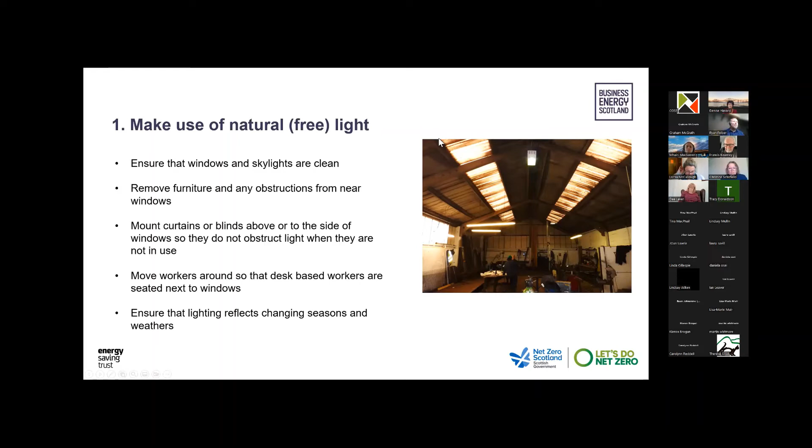Second one is thinking all about heating the buildings. One of the really important things, and again most of you will probably have started putting the heating systems on, is just thinking, how have you done that? Have you programmed the heating systems, or are they just on and off? When do those systems come on?

I'll give you an example. Yesterday afternoon, I'm based in Inverness, it was really sunny. So actually, had I programmed my heating to come back on in the evening, it wasn't really needed. I didn't put my heating on last night. So we've got to really adapt, particularly this time of year where it's not automatically cold.

When do you need the heating? Where are the controls for that? Is it central controls? Have you got individual controls for different areas? And then, obviously very importantly, do all those areas need to be heated? You might be a community group with an event going on that evening, but nothing for the next day. So again, you want to program the heating to be on just for that.

Have a think about when the heating comes on and how good your property or building is at retaining heat. By that I mean, if you're starting at 9 and finishing at 5, for example, you'd ideally want the heating to come on a little bit beforehand, so when you arrive at 9 o'clock the space is warm. But does that need to be on for an hour? Two hours? Can it be on for just half an hour? If it's only half an hour in the morning, that's great.

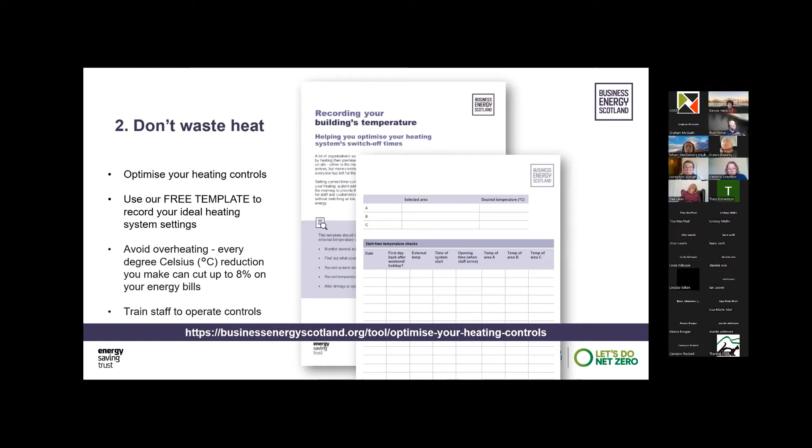We do have a really cool spreadsheet where you can start thinking about that. Use this template to record heat in different areas.

The other one is really thinking about hot water usage, with the idea of making sure there are no leaks and that the taps are running as they should be. A great example is thinking about toilets - most of you will have them. Some of you may have push taps. They're fantastic, they can be great because they turn off the water naturally, but it's really good to think about if they are working correctly.

To give you an example, an ideal push tap should only last around 10 seconds. If it's lasting much longer than that, it's wasting water - you're better off having somebody push it a second time rather than running for too long. It should take about 12 seconds to fill about 1 liter of water. If it's filling much quicker than that, the flow rate is too high, and all this hot water you're paying to heat is literally going down the sink. They're minor tweaks, but do have a look at that.

Obviously the bigger cost is around the hot tap rather than the cold tap, but you are also paying for cold water in most cases.

Do have a think about where the hot water is coming from. We've come across many businesses where they've got electric immersion tanks, and they could be filling up really large tanks for maybe only a few taps. So do these tanks need to be left on all the time? If you're not there over the weekend, or a couple of Mondays and Tuesdays you don't use the premises, then you're probably better off turning that off and reheating it, putting it back on the day you're back in. Ideally a little bit beforehand, because it'll take time to heat the water up, but that will be a lot cheaper than having that hot water constantly there for the two days.

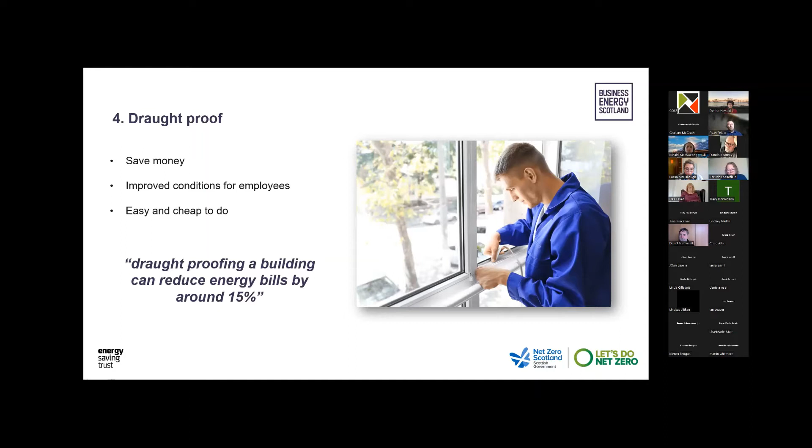This one's about hot desking, probably more initially relevant to businesses that have got desk spaces, maybe different office spaces on different floors. Just have a think that there are a lot of people working from home at the moment, so office spaces aren't being used the same way. If there are opportunities to do hot desking - allowing people to work wherever they want in the building or in the same areas...

This way you may only need to heat one office, one space. There's only 3 people coming in, there's 3 desks in there. So again, just think about the logistics - do all the spaces that are there need to be used?

If you're more of a community group, and you've got your hall, and maybe some groups have got multiple halls, have a think - if you rented one of the halls in the morning, it makes a lot more sense to use that same hall in the afternoon if you can, even if it's slightly bigger or smaller, as long as it meets the requirements of whoever's coming. That space has already been heated, already has some heat in there, so rather than letting that cool down and heating a different hall or space, if you can manage that with the logistics, that's a really good way to save energy.

I've kind of focused on heating, but it's going to be the same with lighting. If there are spaces that are not being used and you can combine those spaces, then obviously the lights and things like that can be off in those areas.

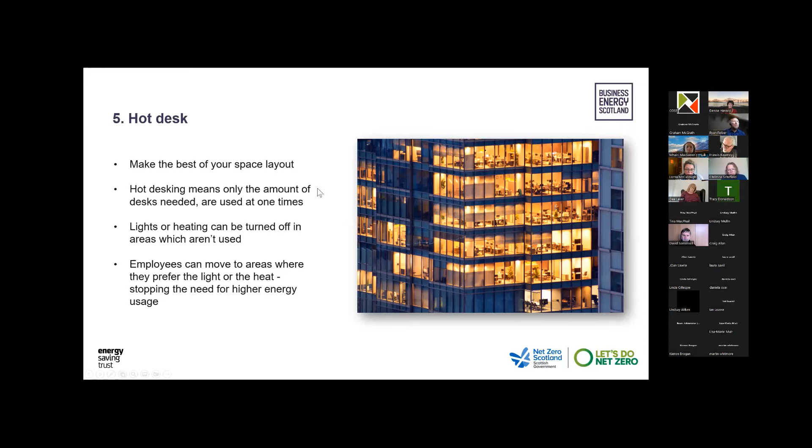This one is about staff awareness. We've talked about lighting, heating and heating controls - it's really making sure individuals coming into those buildings, whether staff or visitors, understand how these things work. We've found so many cases where only one person knows how to do the controls or change the heating, so if they're on holiday or away, things don't happen straight away. Share the knowledge of how things work, what can be turned off, how to program heating for different rooms - the more people know, the better it can be managed and controlled.

If you're slightly larger, we've got a really good resource where you can tailor things to your organization. There's a little quiz you can do, there's even a certificate, raising awareness about what you're doing. And if you're implementing changes, like only putting lights on in one area at a certain point, communicate that so people understand.

We've been to several businesses where it's automatic - whoever comes in first in the morning puts on all the lights, in the kitchen, the bathroom, all the offices. If they start at 8 and everybody else comes at 9, that's a lot of energy for just one individual.

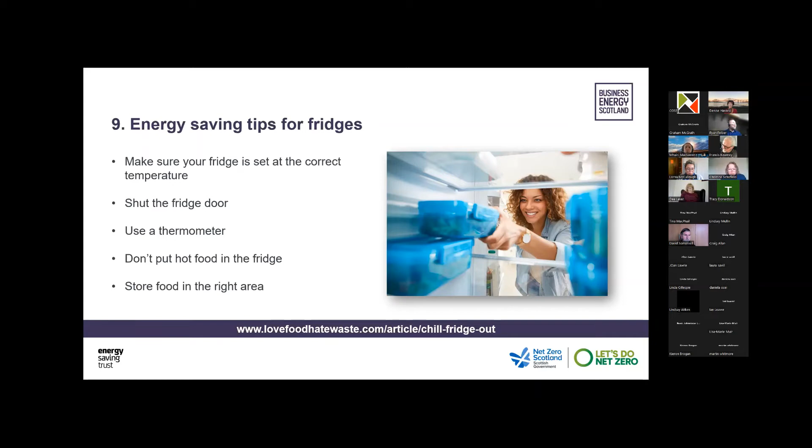And obviously the salad drawers for salads and things like that. One of the little tips, and I think Denise won't mind me saying it hit home yesterday with her: it's easy to open the fridge, grab the milk, pour in your cup of tea, and leave the fridge door open just to put the milk back in. That's at least a good 30 seconds if it's just one cup of tea, and if it's several, it's a little bit longer. So do get in the habit - those few seconds of leaving the fridge door open lets all the cool out, and once you shut it, it's going to work a lot harder, using a lot more energy purely to cool things back down to that temperature. So grab the milk, close the fridge door, pop your milk in your cup of tea, then reopen it and pop it back in.

What that can do is help you understand your usage, and understand if there's very high usage at certain periods. That could be overnight, where you'd normally, if the offices and things are shut, expect a drop in consumption. So if it's the same levels as during the day, then there's something going on. You need to start thinking about what equipment's being left on - is there something running that shouldn't be? You can obviously identify patterns of wasteful behavior, so if all of a sudden there's a spike or change, what's caused that? It could be that something's been left on, even if you thought you'd programmed it - whatever happened there. So really good tools on there.

We also have our profit monsters, and they actually focus on different areas. We've mainly focused on energy, but obviously water and waste are also areas of cost where there are opportunities for savings. So if you want a little more, please feel free to have a look at that.

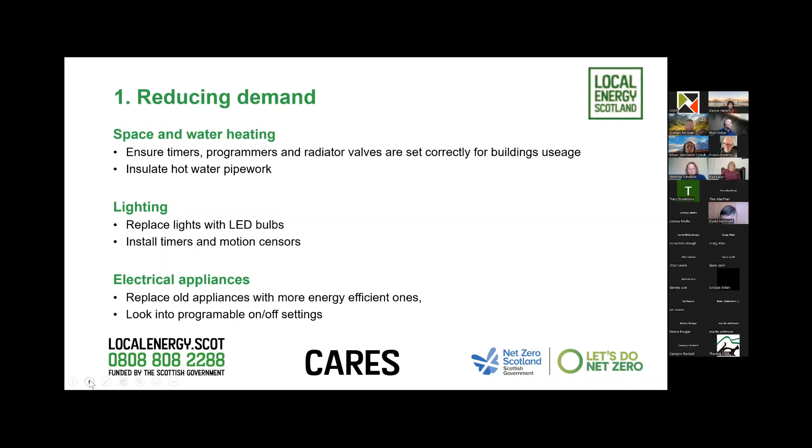The next step in the hierarchy is about reducing losses. When we're thinking about where heat specifically is lost from, I've taken this data from a typical domestic property - a typical gas heated detached two-story building - but it's a good approximation. The majority of heat loss, 35%, is coming from the walls, and a further 25% from the roof. Those are the two big areas of heat loss. You also have 18% loss from the windows, and then 8% lower loss from the floors. The roof and walls are where you're going to have the biggest impact in terms of reducing energy loss, needing less energy to heat the building, and therefore reducing your carbon footprint and your energy bills.

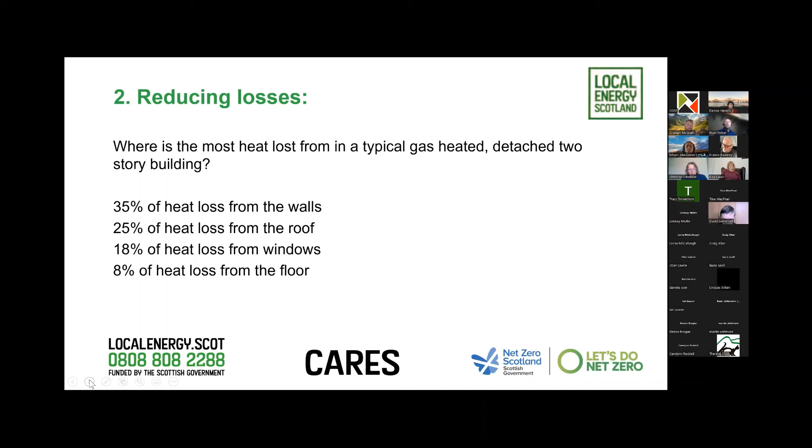Having done that little overview, I'm now going to talk about what different improvements you could potentially look at making to your building as part of any retrofit works. Starting at the top of the list, that's the lowest cost, easiest things you can do. Moving down the list, they get more expensive to install, and generally tend to be more disruptive to the building and the ability to use it.

Draught proofing, something Ryan covered, is that you can go out and do yourself very easily. You could also think about secondary glazing, which can range from a very basic piece of cling film that you put over your window pane to cut down on drafts coming in, to more temporary or permanent perspex glazing that sits behind your existing window, which would maybe be more of a job for a professional to install.

Moving on from that, loft insulation is also very straightforward in a lot of properties, not all. If you're in a church, it might be quite a difficult proposition, but for more modern buildings it can be very easy to just roll some insulation into the loft. If there's any issues around damp or ventilation that you're concerned about, it might be something you want to get professional advice on, or have installed by a professional.

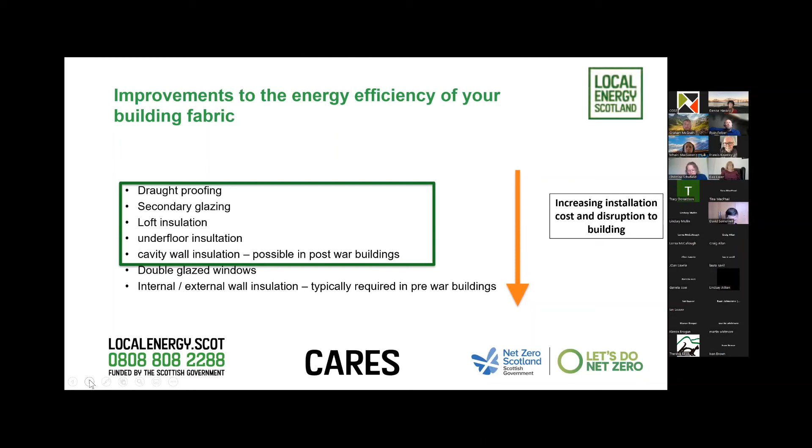You'll notice I'm not discussing absolute numbers here in terms of costs, partly because it's going to be very different depending on what sort of building you're in. Some buildings are a lot cheaper to retrofit than others. Also, with the inflationary pressure at the moment, we're finding that each time we have a new building come through, the contractor quotes are different and prices are going up constantly. Combined with that, energy bills have risen significantly as well. So although installation costs are going up, the potential savings you can make are also increasing. It's worth bearing that in mind.

Next slide please. So moving on to the final step in the pyramid, which is generating. Once your building has reduced your losses and reduced demand, you might then want to think about ways to generate your own energy. One of the go-to ways to do that on a community building with a suitable roof would be installing solar PV panels. If you've got a south-facing roof, that's perfect, but they also work on east or west-facing roofs, and if you have a suitable roof it can be a very quick installation project.

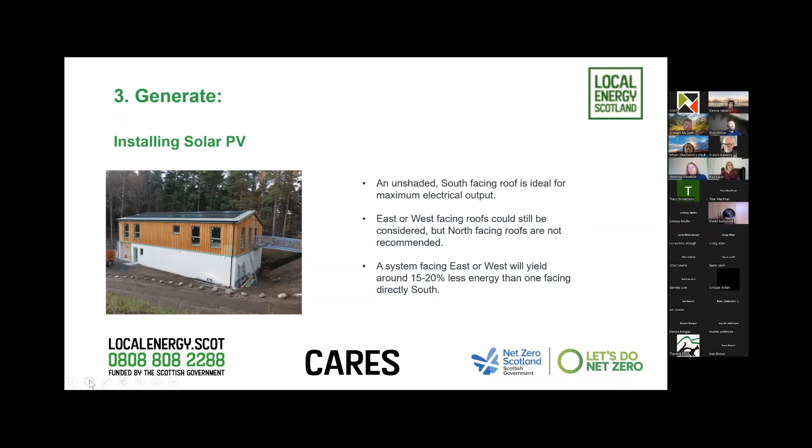Next slide please. Combined with that, technology has really moved on leaps and bounds now, and installing solar PV with a battery now makes a lot of sense. The key use for batteries in community buildings is so that when it's sunny during the day, perhaps you're generating energy in your solar panels, but you might not need the lights on, or if you have an electric-based heating system you might not need the heating on. But in the evening, perhaps there's more usage in the building, you want the lights on, and that means you can have stored the energy generated during the day and use it in the evening. So they can be a very effective combination.

Next slide please. Moving on from generating electricity, now thinking about generating heat. The go-to solution in a lot of buildings, if you want to generate your own heat renewably, will be an air source heat pump. These operate a little bit like a fridge in reverse, so it compresses cool air which increases the temperature of the air, and that's used to heat the building. Compared to a standard electric heater, which has a coefficient of performance of 1, meaning for each watt of power consumed it produces 1 watt of heat, air source heat pumps tend to have a coefficient of performance between about 2 and 5. So they're much, much more efficient than a standard electric heater.

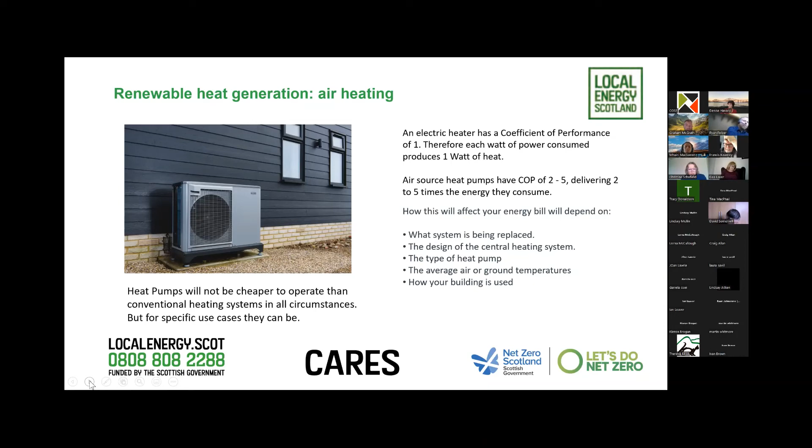Finally, on renewable heat generation, you can also have solar thermal panels to generate hot water renewably. These look an awful lot like solar PV systems, and often if you've got roof space, it might not be the most effective use of space to try and install both solar thermal and solar PV. So you might be wondering which to go for.

That really depends on what your building usage is like. Generally speaking, solar PV tends to be favored as there's a wider variety of uses for the energy that's generated, and they're a bit simpler to install as well. But we do support projects with solar thermal, and it can be useful technology.

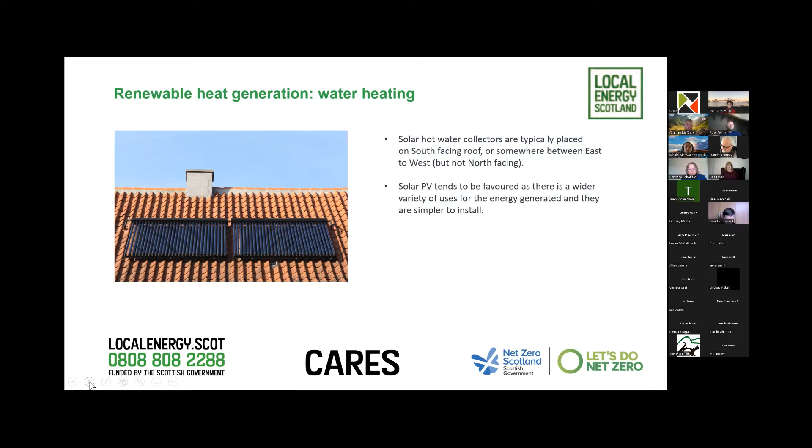Final slide, please, Mhairi. So just going back to this slide that I looked at briefly at the beginning, as I mentioned, all these different technologies that I've run through aren't going to be suitable for every building, but there will always be a solution for the one that you're in.

As I mentioned, older buildings like this church on the left tend to be more expensive to retrofit compared to a more modern building, just because of the construction, and also there might be various issues or hurdles to navigate around planning with regards to windows, things like that. So it's worth bearing that in mind.

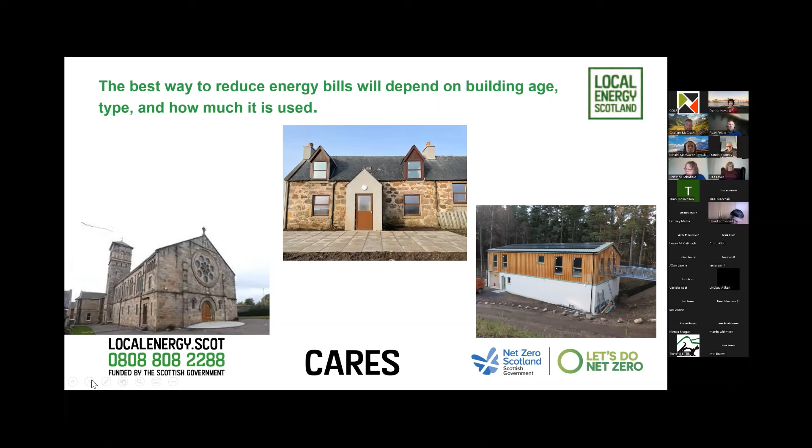And you're now obviously thinking, I've run through all these different things that you can do to your building, but where is the money going to come from to do that, because obviously all these measures do cost money up front. So I'm now going to pass on to Mhairi, who is going to discuss how we can support you to start down the path on one of these types of projects.

As mentioned, we've got development officers that can help with this. And as Graham explained, sometimes we have more complex projects that aren't quite so straightforward. So in some instances, we will be able to bring in technical support as well for that, and we would allocate time out to that.

So who's eligible? Village halls, community centres, community hubs, sports facilities and faith buildings. We've got different organisations such as Scottish Charitable Incorporated Organisations, private companies limited by guarantee, community benefit societies, community interest companies and organisations that are constituted but unincorporated can also apply to us.